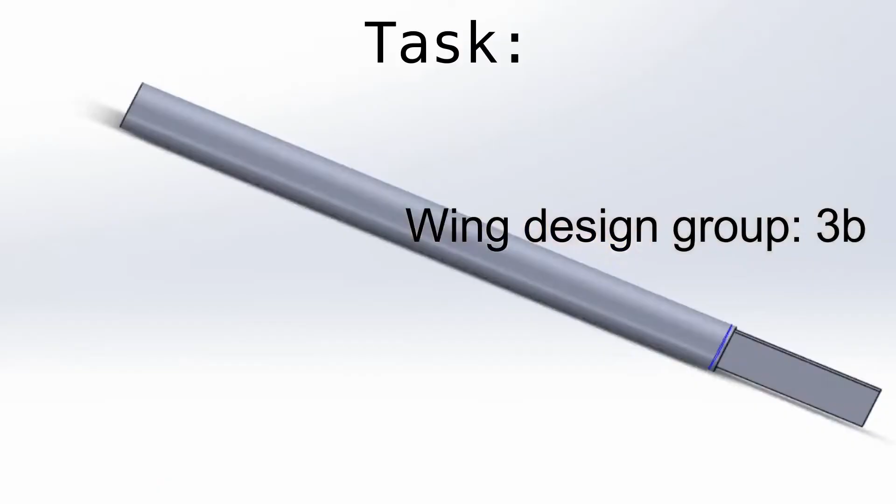The wing design has to meet certain design criteria. Essentially, the spar must fit inside the wing profile, take the load specified, and be made as light as possible.

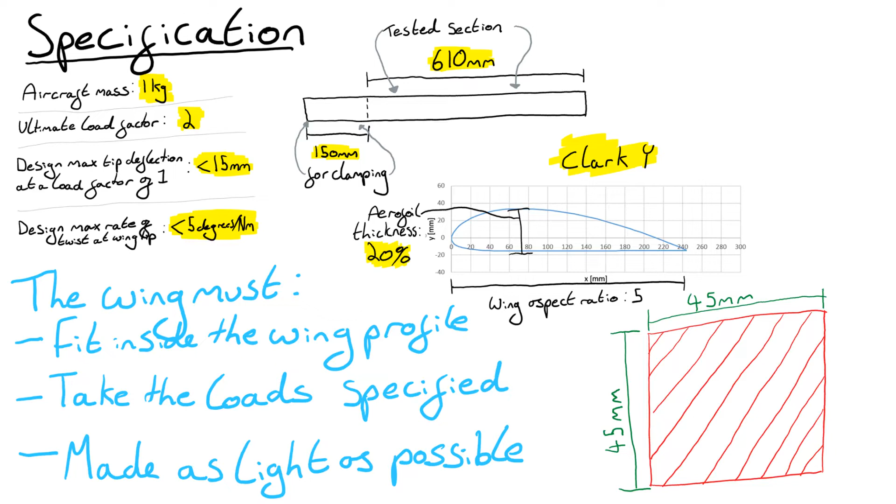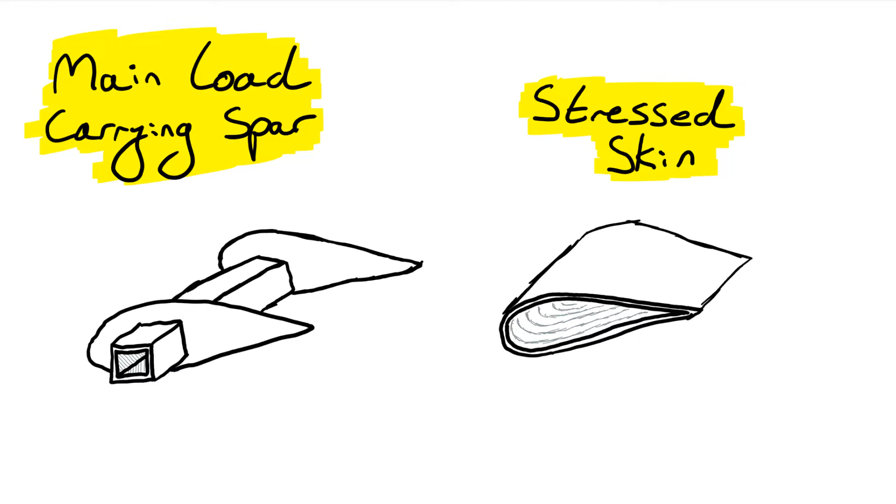We begin the design process with the conceptual stage. Here we built mock-up spars to compare A-fold, B-fold, 45-degree cut, and crushing. We decided on a main load carrying spar manufactured with the crushing method for its simplicity.

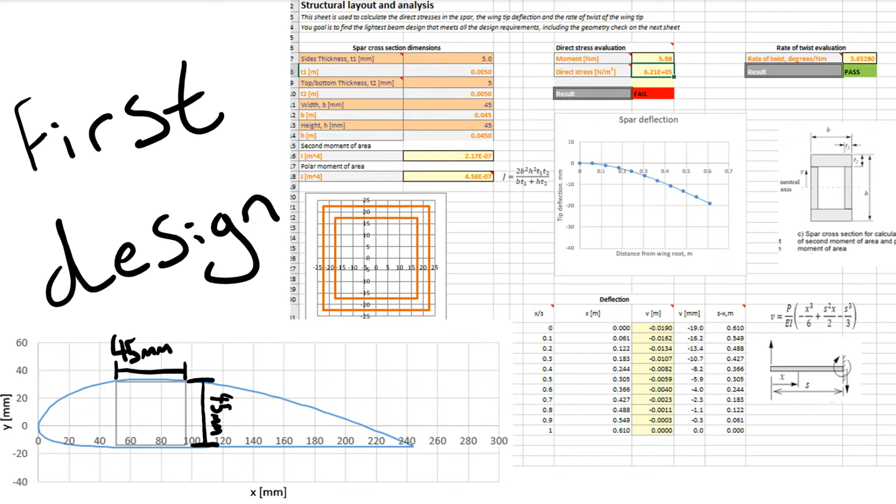Following the conceptual design is the preliminary design stage. We found the maximum cross-section to be 45 by 45 mm and ran stress calculations through Excel. This allowed us to reduce the cross-sections for other test spars and further validate Excel.

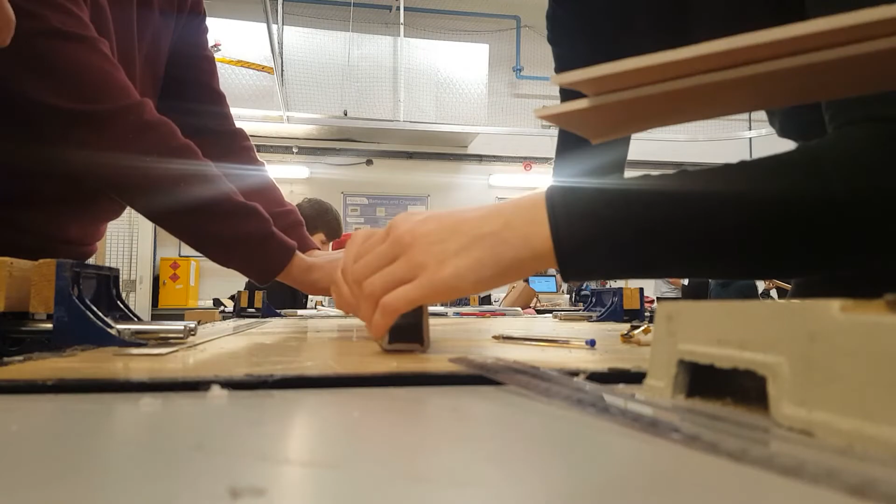Next is the detailed design stage. The thickness of the foam was a set value at 5 mm thick. We used Excel to calculate a minimum spar cross-section that would survive the loading, and found this to be 35 by 40 mm.

We also found that we used 20 grams of hot glue on the first spars, doubling the effective weight. We were able to reduce this to 2 grams.

Finally, we move on to acceptance and evaluation. After plotting all the data from the 3 different spars, we found Excel and SolidWorks predicted worse performance as all the spars performed better. The spars exceeded all of the criteria for the final spar. This meant that we could now focus on reducing weight.

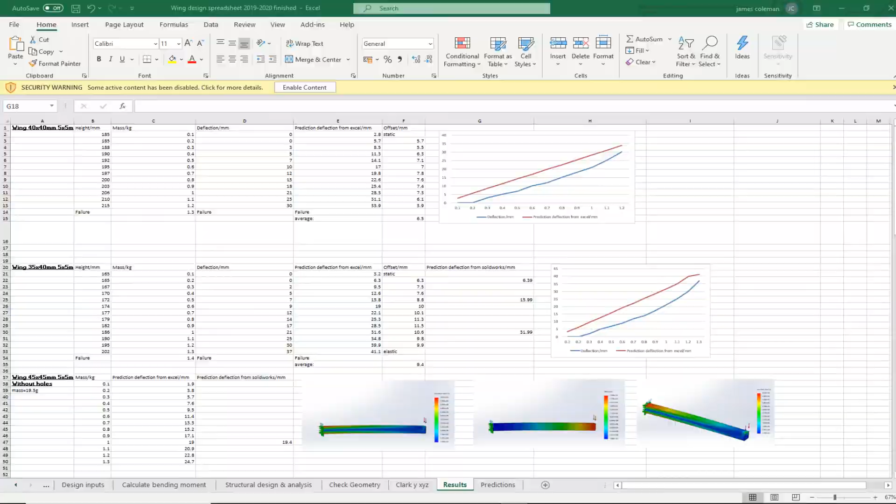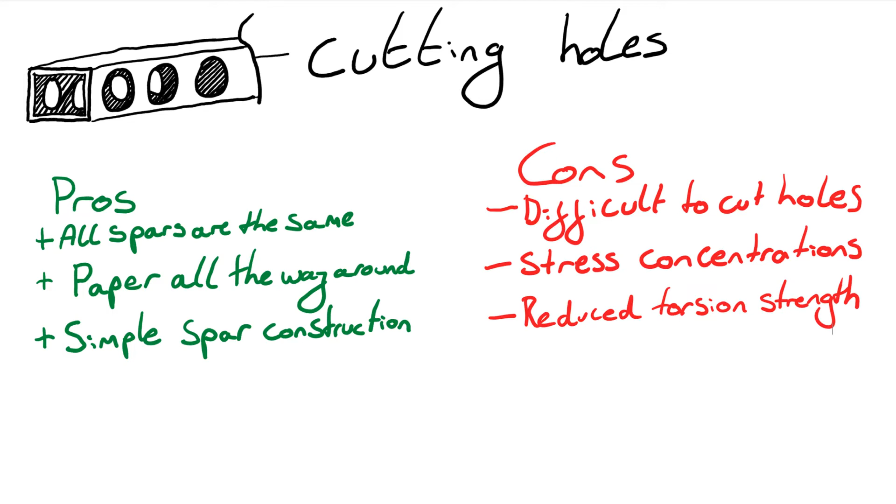Taking all of our data into account, we started the next iteration cycle of the design process. There are 2 main ways to reduce weight: cutting holes and tapering. We decided on cutting holes as this meant every spar could be built the same. The manufacturing of the spars was also more straightforward and paper could wrap around the spar more easily.

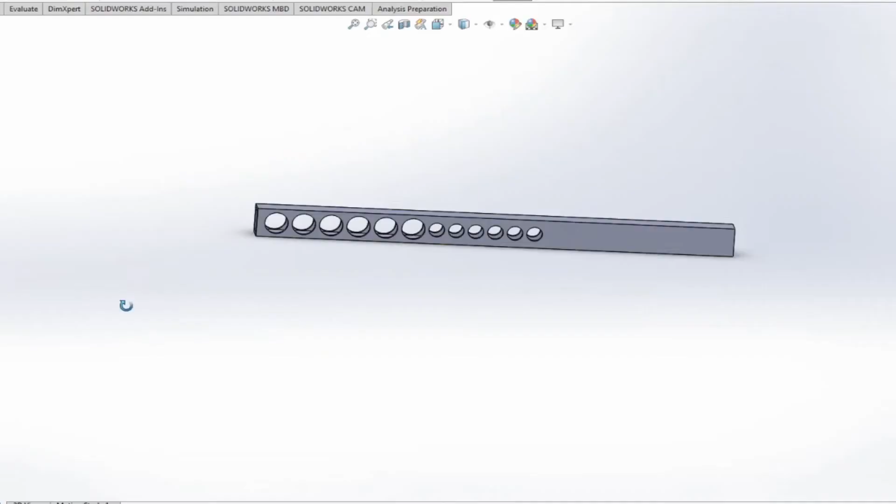We ran some SolidWorks simulations and built it to validate SolidWorks. Naturally, the spar had greater displacement than before, although it was still within limits so we could lose some more mass. We made a new SolidWorks model, completed assembly of the wing and ran simulations.

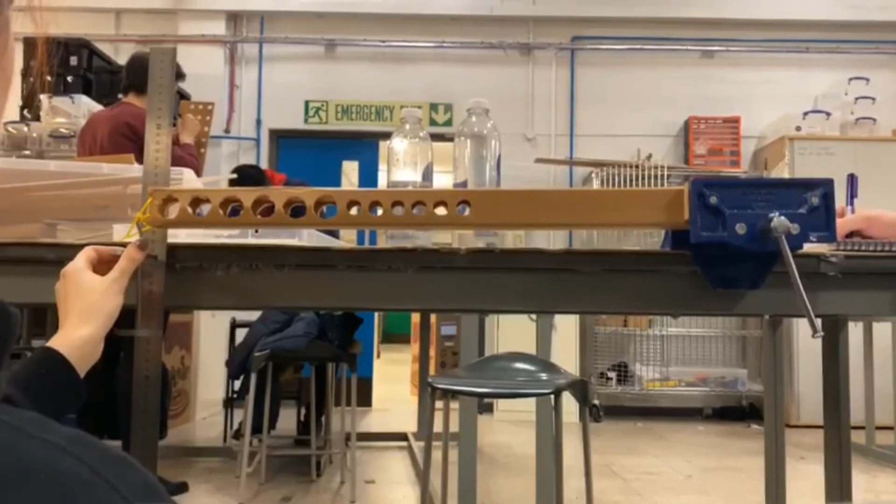Next was to build and test this final iteration spar. The spar performed well, passing the torsion and failing at exactly 1 kg. However, at load factor 1, its displacement was 16 mm, 1 mm outside the range.

Cutting holes like this got us a 15.5% reduction in mass. However, variations in the density of the foam caused the spar to be heavier than anticipated.